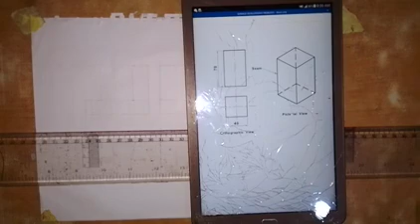Here we are going to be working on the surface development of some solids. And now we are starting with that of the square prism. As you can see on the screen, I made the pictorial view of a square prism here, and I also made the orthographic views of a square prism. Okay.

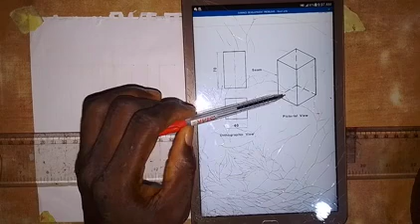What we have here is a pictorial view, and I want you to see a very important part when it comes to the surface development, which we call a seam. And a seam is a point where we cut the object for us to open it and spread the surface. So that is what we call a seam.

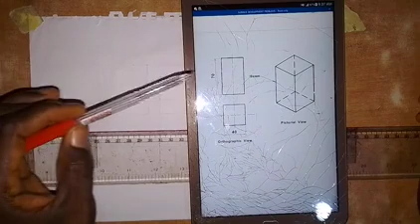So when you look at a tin of milk and you remove the paper on its surface, you will see a line. That is where the plate is joined together to form that cylindrical object. So we call it a seam. So that is what I indicated here.

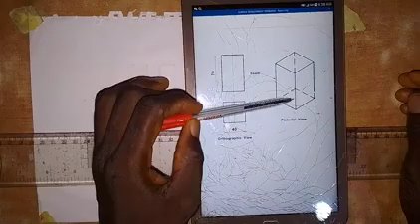Now when it comes to the surface development, what we are to draw is the orthographic view. So we are not drawing this pictorial view, but we are drawing the orthographic view for us to do the surface development. Now, in this orthographic view, we have the top view.

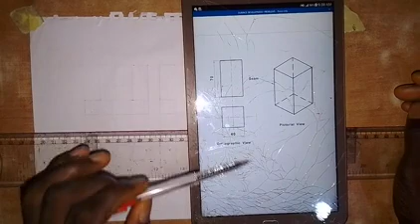The top view, that is the top of the square prism, is a square, and that is what we have here, a square of length 40 millimeters, and the front view is a rectangle, which is of a height of 70 millimeters. So this is what we are to draw. The orthographic view is what we are to draw, and then we go on and produce the surface development of the object. So let's go and see how this work can be done.

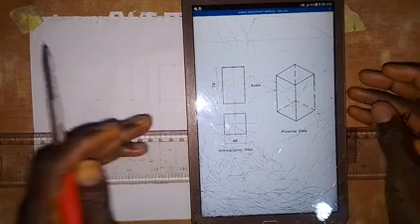So as I said, what we are to draw is the front view and also the top view. So we draw a vertical center line here. Then we come up a bit and draw a horizontal center line like this. Then the length or side of the square, which is the top view, is 40 millimeters.

So from this point here, where the two lines meet, take 20 millimeters to the left side and take 20 millimeters to the right side. Then turn the ruler, and take 20 millimeters up and 20 millimeters down. Okay, so we are going to form a square with this. So here we draw a horizontal line, and here we also draw a horizontal line like this.

Then with our set square at this point, we draw a vertical line, and here also we draw a vertical line. So what we have done here, we have the square base of the square prism. So let's make it a thick line. Okay. Make this a thick line, and also make this a thick line. And lastly, make this a thick line. Alright, so this is the square base of the square prism.